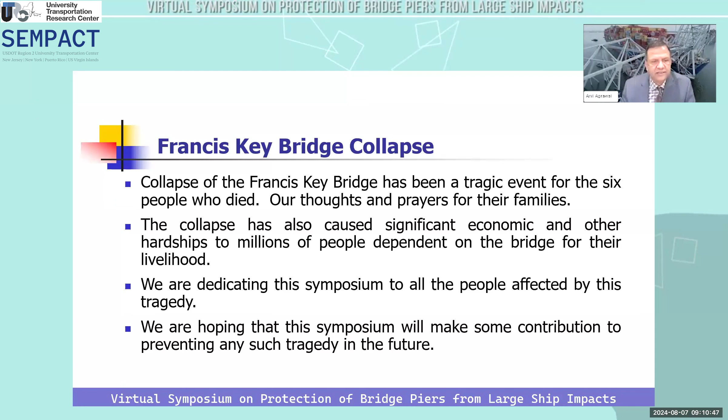Just to introduce the symposium, registration-wise, we have close to 750 people. Right now, I saw we had more than 400 people. The registration was from almost 25 countries. We have expert speakers from different time zones: Denmark, Australia, China, USA.

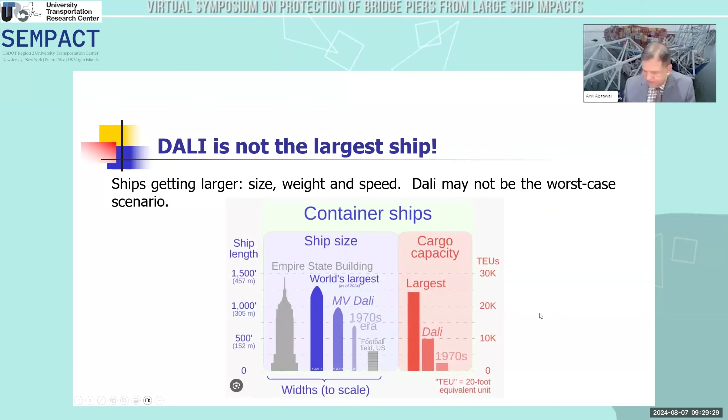So these are massive ships. But also if we look at another data, how the loading of these ships is increasing, then we can see the growth of the ship from the 1970s all the way here. And we are here. So Dali had a DWT, what we call deadweight tonnage. It's almost close to 116,000 ton.

And one of the heaviest ships that we have now, the deadweight tonnage is around more than 240,000 ton, more than double of the Dali. But also, for impact engineering, when we think about the impact, we have to consider something called displacement weight, which includes the weight of the boat itself. So if you include the weight of the boat itself for Dali, the weight will be actually not the DWT, which is 116,000 ton, but it will go to close to 150,000 ton.

And for one of the largest ships, around 10% is the self weight, so they will go to around 280 to 290,000 tons. So these are massive ships, and what do these massive ships actually mean in terms of guidelines? So I found this, and Professor Pedersen will talk in detail about his research. But I was reading his paper almost a month ago when I realized what these large ships really mean. So this is the DWT and this is the crushing force.

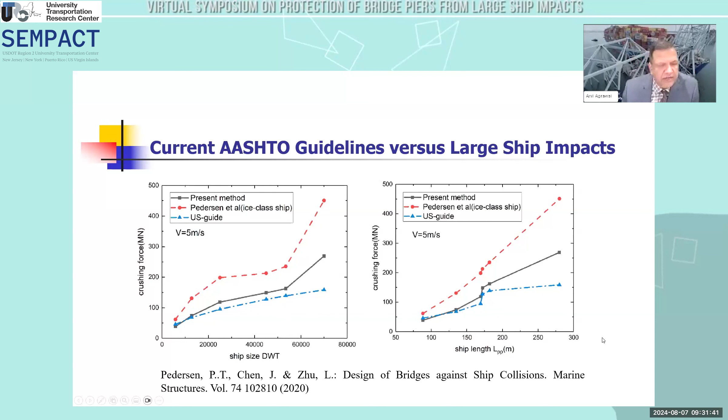And this is our AASHTO guideline, the blue curve, and it's uniformly increasing. And these are other methods by which you calculate the impact forces. And you can see that after some DWT, the impact force increases so much, it's way higher than what we have from AASHTO. And the ship length also has a significant impact on the impact forces. So the guidelines we have right now in AASHTO, which were essentially triggered after the Sunshine Skyway Bridge collapse in Florida, we need to look at those guidelines to see what exactly we are doing.

But the bigger question is, do we really have to design the bridge for large ship impact? Does the bridge have to take all the impact forces? Well, a similar analogy is blast protection of buildings: when you go in front of buildings, you see these bollards. And these bollards are basically there so that a vehicle cannot get close enough to the building, so the shock effects don't affect the building so much.

If we apply the same thing, then this is a problem of risk management: we do whatever we can to prevent the ships from impacting bridge piers. We could use rock islands, pedestals, platforms, barriers, dolphins, whatever works. Impact resistance of the pier, of course, they should be designed for impact, but that should be the last line of defense. We need to do continuous assessment based on the ship traffic and AIS data, and Zoli from HNTB is going to talk a lot about his insights into this one.

We need to design the system for guaranteed performance, and computational technology allows us to do that, just like the bridge barriers you see on the highways, which are crash tested and then verified through simulation. We could do the same. We could design the system so that a tragedy like the Maryland bridge collapse doesn't happen.

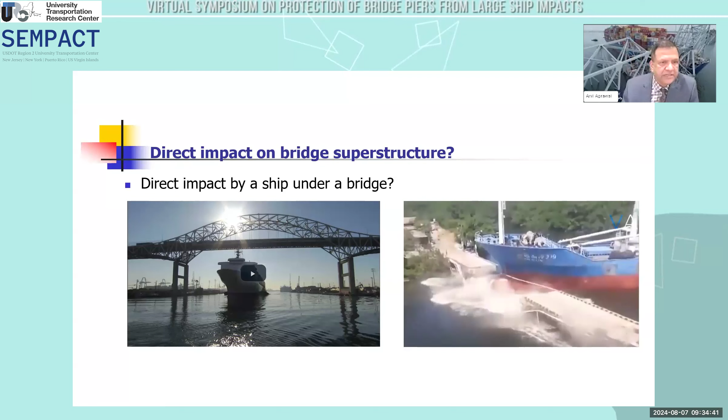I remember, many years ago, around 2000, there was an incident at the East River bridge where one of the ships had some equipment not secured. It hit part of the bridge, a major bridge. Fortunately, nothing happened. But this is another problem of large ship impacts on bridges that we probably need to think about.

So these are some of our thoughts, but I think we are going to hear a lot more from our experts on this topic, and we are going to learn a lot. And your feedback is very important, because we have a lot of people in this room and we want to get all kinds of feedback, so we can develop a roadmap based on the symposium for where we could go in addressing this problem.

So with this, I would like to invite our keynote speaker, Dr. Pedersen.

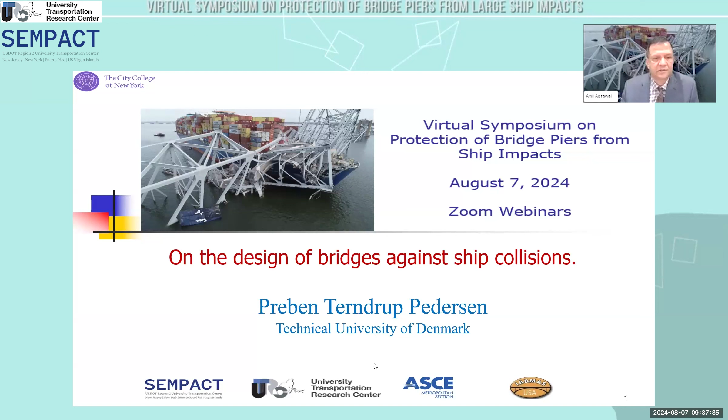No, this doesn't work. Scott, have you given me control? I don't have control here. Scott? Do you have the control now? Oh yeah, now it came.

Now it came, okay. Let me start by saying a little bit about what I'm going to talk about here. First, I'll give you a bit of my background for giving this talk. Then I'll talk about criteria for risk acceptance - what should we strive at - ship collision probability analysis, and then consequences. These consequences I'm going to talk about will really be restricted to the ship impact forces. So that is what I want to talk about.

My background, as was told, is that I'm a professor in naval architecture at the Department of Naval Architecture at the Technical University of Denmark, and my fields are really mechanics and naval architecture. But I also have a bit of practical experience, which is what I want to talk about. I was advisor for an offshore company on ship collisions against some production platforms in the North Sea. With this background, the bridge owners in Denmark - that's the government really - asked me to be advisor to them on some ship collision issues related to bridges we were going to build in Denmark.

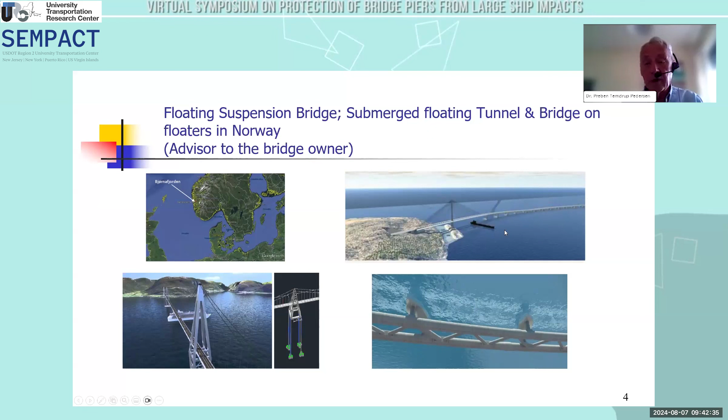And finally, this one here, this is a bridge on floaters, so all the piers here are on floaters. This one, of course, has substantial ship risk problems. This one is actually under construction now. So that was a little bit about my practical background.

Now I'll go to more technical matters. First, criteria for risk acceptance. I think it's good to hinge the discussion on what is risk. We know that risk is a combination - the risk R is a combination of the probability, PI, of an event and its consequences.

Normally, when we talk about risk and risk acceptance criteria, we have to sum all the different types of risk. This could, of course, be earthquakes, fire, or airplanes crashing into pylons, but above all, ship collisions. I'm going to talk here about the probability of accidents and consequence, and give some more information on that.

Of course, you have to do risk analysis during installation, but I'm only going to talk about operational risk. We have to look at the risk for the users of the bridge. The risk for the user of a bridge should probably not be much higher than the risk of driving on an ordinary highway. So that is one type of criteria you can start off with.

There's a financial risk for the owners, that's obvious. We also have risk for third parties which do not draw advantage from the bridge. If you look at, say, the Danish bridges I showed you, they are all over international waters. The IMO, the International Maritime Organization, a UN organization, has requirements that it should not be more difficult for ships to pass under the bridge than it was to pass the bridge line before it was constructed. So that is something to take into account.

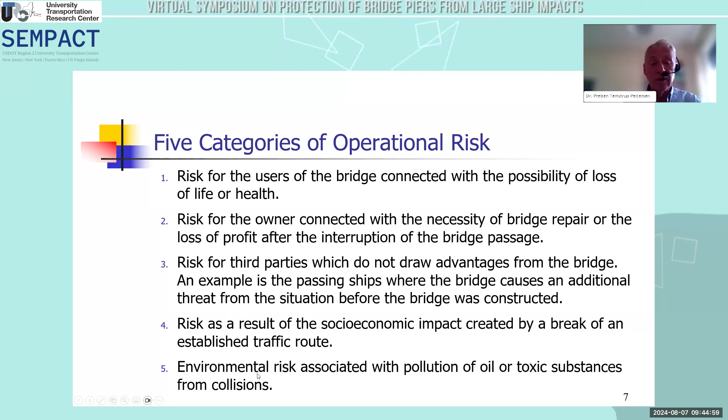So all this leads up to some risk acceptance criteria. It's obvious that a primary measure of performance for such a bridge will be to ensure that the occurrence of large accidents with fatalities - a bridge falls down, for instance - and lengthy interruptions is low enough to be acceptable to users, the public, and the relevant authorities. But we cannot ask for zero risk; we must at the same time allow an economic construction and operation of the link.

So that is this balance which we have to do. Of course, the risk level we shall accept is very small. Therefore, the likelihood of future rare events, such as ship collisions, we cannot predict or extrapolate this from similar events elsewhere - that's simply not possible. So the best we can do is try to establish models, even if these are difficult to verify, because of the small number of accidents. So we cannot measure the risk particularly well, but we can decide what the level of risk should be, and then use a model to verify that these selected criteria are met.

I really think that the risk acceptance level should be hinged to the model you're using to verify it.

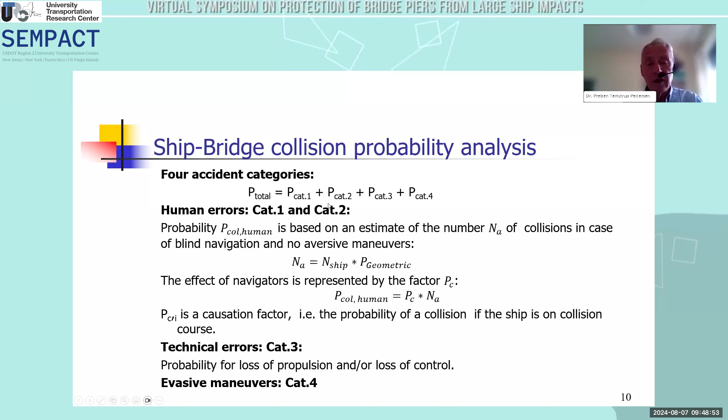This idea was developed by Dr. Fujii in Japan. He was studying accidents in the Bay of Tokyo and really laid the foundations for much of this. Then there are technical errors, of course, as we saw recently in the disaster, where you have loss of propulsion - a blackout - or loss of control - a steering gear failure. Finally, the last category is evasive maneuvers in the neighborhood of a bridge. I'll give a bit more detail about these 4 categories in the following.

Category 1 is ships which follow the main route. Here we have a bridge line and a 2-way traffic situation. Let's consider ships coming in from the south - ideally they should all be right in the middle of the navigational route, right here. But of course due to wind and waves and general navigation uncertainties, you'll have a certain distribution of vessels on this line, which we can call f of z.

You can see that part of this probability area will collide with this pylon if they don't make any change in their course. So this is the NA, the integral of this function f(z) over the width of the pylon, multiplied by the number of ships. That's the NA we had before, and now we can multiply that with the causation factor PC, which depends on a lot of things you can influence - for instance, having a pilot on board, a vessel traffic system, guard vessels, and good markings. All this will help reduce PC.

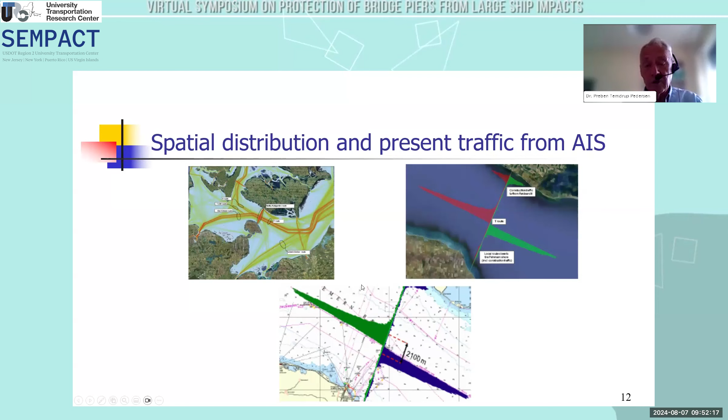So that is, and of course, we can also get the present number of ships per time unit passing this line here. So this was category 1.

Category 2, then it will be ships which fail to change course at a bend in the seaway. Let's have a look at the same figure as we saw before. We'll now consider ships which come from the north, and there is a bend in this seaway, as you can see here. But some of the ships may not observe this, may not do this bend.

And if they do that, then of course you can see there's a much larger probability area here which can collide with the pylon than what we had before. And you can see it also over here. We'll have a much larger geometric probability. So this N ship times Fz, that is a much larger value here.

And of course, it's the same PC. But then we have to multiply it with the probability that they do not make this bend. And that's hopefully a small number. This P naught must of course also depend on the distance between the bend and the bridge, this distance D here. If this is large, of course, the navigator has more time to discover that they are on a wrong course. How do we get this P naught then?

Again, we can try to use this AIS. Here's an illustration of a ship which passes a bend. So we have here, that's the route, and that's where nearly all the ships go. But there's one here which goes with unchanged course and speed until it's nearly aground before they find out that it's on a wrong track and then come back again. By studying AIS tracks, we can get a lot of information about this P naught as a function of this distance D.

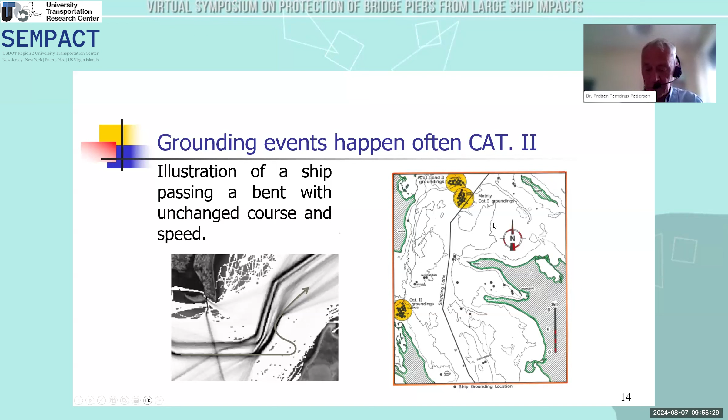Category 3, that was a problem related to the loss of propulsion and steering gear failure. Ships have a blackout, and it happens. Well, some published figures for that - that is this 1.5 times 10 to the -4 failures per hour. It corresponds to once or twice a year, something like that. That's exactly what we saw with Dali against the Baltimore Bridge.

Of course, there is a chance that you can repair, that you get the engine started again. And one used formula for that is the Weibull distribution given here. And you can see a graphical representation here. You can see that there's about a 50% chance that you get the engine started within, say, 15, 20 minutes, something like that. And then the ship will probably be on the same course and just slow down a little bit, not very much actually.

So that is one way, of course, and the rudder failure, that's given by this number here. But if it takes longer time before you can have the engine started up again, or you cannot, for instance, set out anchors to stop the vessel, then the ship will start drifting. And then the drifting, a ship will normally drift sideways. And of course, the direction and the speed would depend on the current in the area, the wind in the area, and all that. But that really you have to take into account.

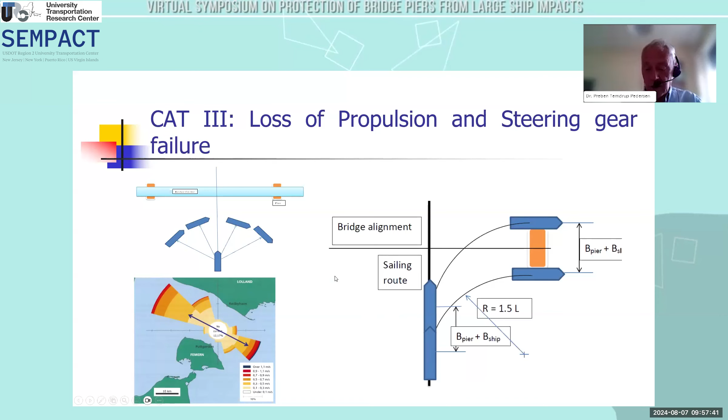The final category for collisions is evasive maneuvers near the bridge. If the bridge opening is a little bit narrow, and large ships meet there, they may be scared and try to do evasive maneuvers, which may end up with contact with the piers sideways.

You can get an idea about that possibility by looking at these safety zones, or comfort zones. Each ship has such a comfort zone around it. So if another ship is inside this comfort zone, they'll quite often try to make evasive maneuvers. These comfort zones have also been studied using AIS to see what's the size of them.

For open water navigation, it's something like this. It's proportional to the length of the vessel. When you know the length distribution of the vessels and the traffic, you can make a simulation and see how many close encounters you have per year as a function of the span width here in kilometers. So if you're down here, then the number of evasive maneuvers will be quite small.

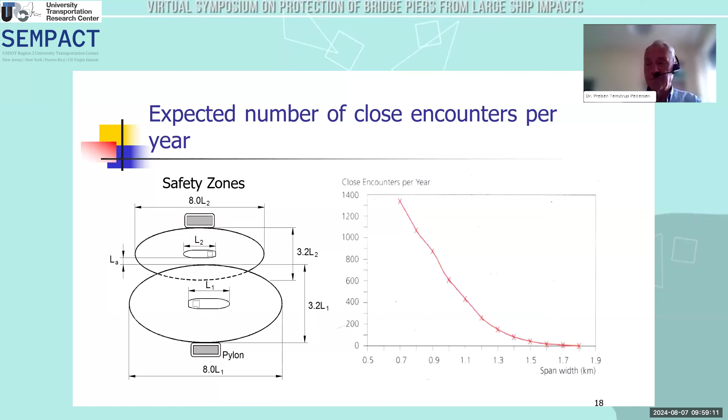It may be something you can neglect. But if you have an existing bridge with too narrow an opening, that may be something you have to think of. So now I've given you some elements in the ship collision probability analysis. The next thing will be, if we have these ship collisions, what are the consequences of these collisions?

There are many ways in which a ship can collide with a bridge. Here is depicted a sideway collision, which can be due to drifting, or due to maneuvers in the vicinity very close to the bridge. So we need formulas, we need expressions for sideway collision forces.

We also saw in Professor Agrawal's presentation that deck house collisions are something where we have a lot of spectacular collisions, where the deck house or a container stack collides with the bridge girder near the abutments. But here I'll mainly focus on bow collisions. You have a ship which collides with, here, a pylon, but we'll look at the collapse and the forces which such a ship bow can exert against some rigid wall.

Exactly, that's what we're trying to do. A ship bow is really a complicated structure, and this is an ordinary vessel without ice strengthening. You can see, for instance, the bulbous bow here, and you have lots of close stiffeners here.

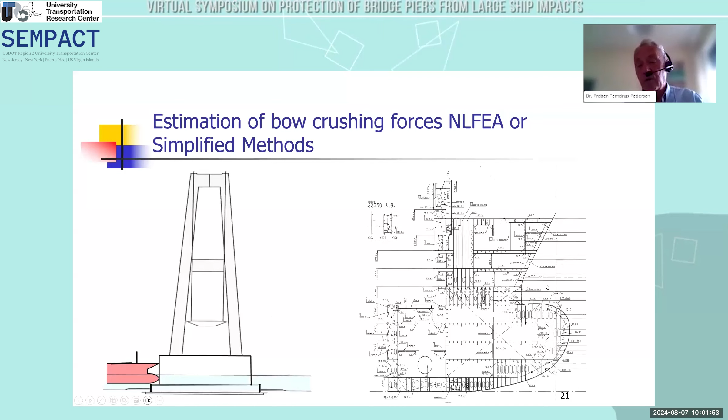Because of these complications, and because we want to make a lot of generic ship collisions in order to get some mean values, I prefer to use simplified methods, since we don't even know what will be the future striking vessel against our bridge. Simplified methods, quite often, are based on what most of us have learned at school: the upper bound theorem of plasticity.

It goes like this: you take the bow structure and make a cut at each frame, for instance, and then look at what kind of strong elements against crushing you have here. We have L sections like this, T sections like here, and we can have X sections or cruciforms like the one down here. For each of these sections, you can then calculate what is the crushing force.

We assume a certain kinematically allowable displacement function or collapse function, and then we calculate the energy which goes into bending and stretching of the material. We do that for these sections, and from that, we can get the forces by looking at the energy divided by distance.

That has been done, and made even easier to use by two well-known authors in this area. Jørgen Amdahl, in his PhD thesis, presented this formula here. You can see it depends on the number of X sections and number of T sections, etc. Sigma naught is the flow stress, the mean between the yield stress and the ultimate stress.

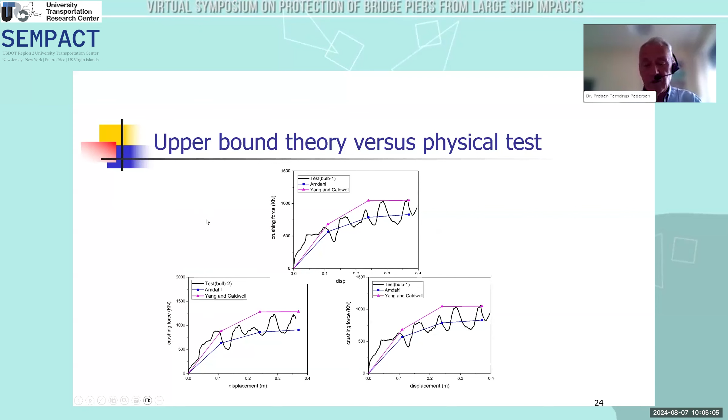You could say, why don't we use full-scale testing? Because that's the real test. And there are many ship-ship collisions, for instance. But in ship-ship collision, the bow is normally the very strong part. So the striking bow will normally always penetrate the side shell of the struck vessel. So we don't get much information about the bow strength from such collisions.

And of course, you could take an old ship on the way to its scrapyard, instrument it and run it into some fixed object. But that would be expensive. I've not seen anybody who's willing to sponsor that. But I was fortunate enough to be involved with an accident where a ship came into a harbor and suddenly they had a blackout, like the Dali. And the navigators on the bridge couldn't do anything except notice what happened.

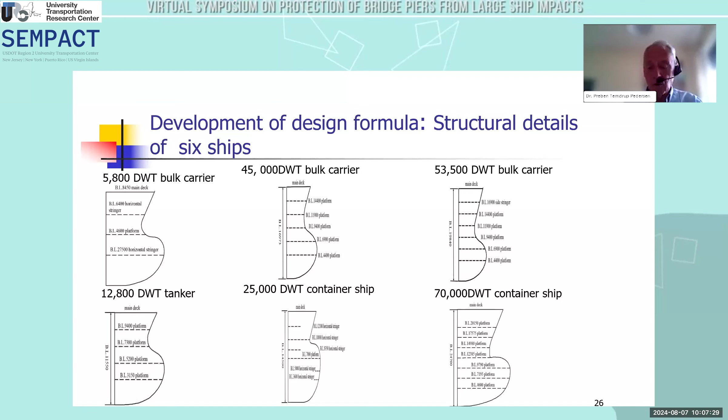Okay, so we used 6 ships to develop a design formula. We took the drawings of 6 ships, 3 bulk carriers, 1 tanker, and 2 container vessels. And for these ships with different loading conditions and different speeds, we did calculations of the bow collision forces. You can see the result here. This is the Amdahl curve, and this is the Yang and Caldwell.

And you can also see we tried to make separate predictions for the bulbous bow, because we have a step here. It would be nice to know the bulbous bow forces. So we did that for all these 6 ships for different speeds. And based on these results, we took the maximum forces and tried to make an empirical formula for maximum bow crushing forces, which can be used by bridge builders.

We used as a free parameter the kinetic energy mv squared. So we have the mass and the velocity included, and we also included the length between perpendiculars. This length really determines the scantlings of a ship hull, because the wave-induced loads depend very much on this LPP. So length is better than deadweight tonnage, in my opinion. This formula that we derived has the same format as the present Eurocode.

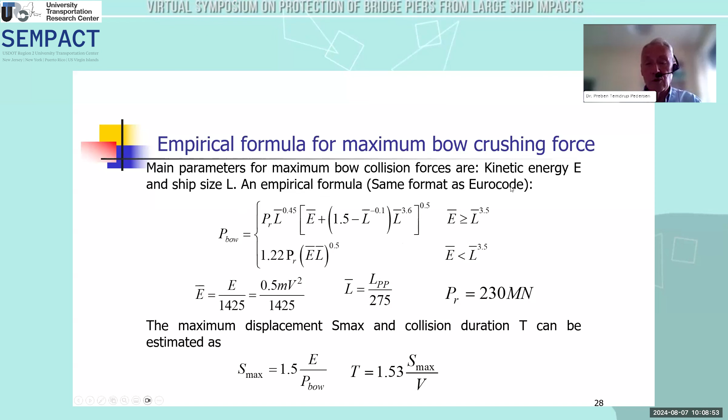So let's try to compare this with what we have in the existing codes. We did a similar calculation in 1993 for 6 different vessels in connection with the Great Belt. They were all strengthened according to the DNV Baltic Ice Class. We did that because at the entrance to the Baltic Sea in wintertime you have to have ice class. So a good proportion of all the ships going through the Great Belt had ice class.

And to be conservative, in this calculation we assumed all ships had this ice class. So that's of course a conservative idea.

Identical expressions were then adopted by IABSE SED 4. That's this green book many of you probably know, which was published by Ole Damgaard Larsen. And it was also adopted by Eurocode for a speed of 5 meters per second. Unfortunately, they did not mention in the Eurocode that this was developed for ice class vessels.

And another recommendation is, of course, the US guide AASHTO, which has this shape here. And this depends on the deadweight tonnage and does not depend on the loading condition. And of course there's quite a large difference between a loaded bulk carrier and one in ballast, more than a factor of 5.

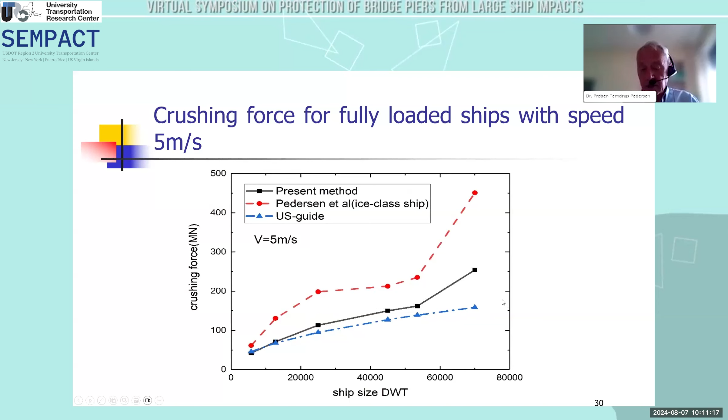We can have a look at a medium-sized container vessel. This is the Emma Maersk, which started regular service in 2006. I was very much involved with the construction of that, so I know it very well. This can take 15,500 TEU, and it was the largest of these ships at that time. It's about 400 meters long.

We also want to know what is the local pressure. When you design a pier, the local pressure is important, of course. You do not want local damage before you have overall damage. And here we looked at the bows for these 6 different ships, and then looked at the force divided by the outer area of the bulbous bow at that penetration. So this is some average pressure, you could say, as a function of this imprint, AW, that is the outer bulb cross-sectional area.

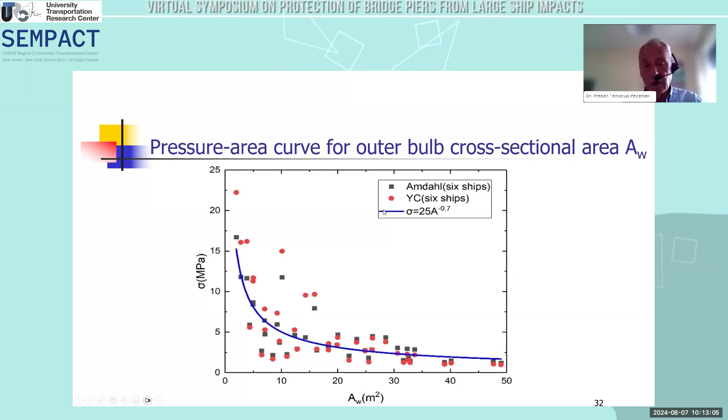And you can see there's lots of scatter. We have here a mean curve, which is given by this. This is the same shape we chose as we have for ice pressure, and we have, of course, also more or less the same scatter as we have in ice pressure.

What I've been talking about now is what you can do when you design a bridge, and of course we should know that a bridge will have a lifetime of 50 to 100 years, and a lot of things happen with the number of ships, the size of the ships, and the structure of the ships, and we will have a lot of new navigational equipment. And hopefully we will also get better prediction methods. So for this reason, we should, at regular intervals, say every 10 years, redo these calculations to see that we live up to the requirements set up by authorities or whatever we have.

Okay, I'll come to the conclusions for my talk. The collision frequency model depends on empirical and uncertain factors, such as the lateral distribution, FFZ, the causation factor, PC, the probability of missing a course change, P0, etc. With AIS, we have got a lot of new information about these quantities, but we should really try to get further data to improve our predictions. That's very important.

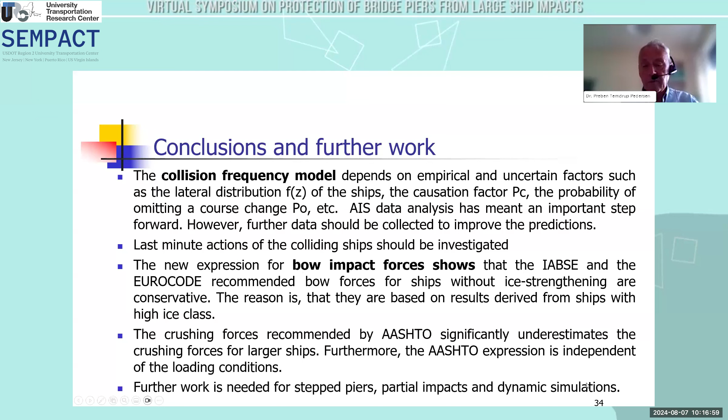We need further work for stepped piers, partial impacts, and of course, dynamic simulations of the impact. In this force, the new expression, we took into account damage and the speed using the Cowper-Symonds relation, but we should do it in connection with the pier response, of course.

Okay, I have to say this presentation is primarily based on 2 papers, and I really want to acknowledge the very heavy contributions from my co-authors, Sverre Valsgaard, Dan Olsen, Søren Spangenberg, Yin Chen and Ling Su. They have done a lot of work in this.

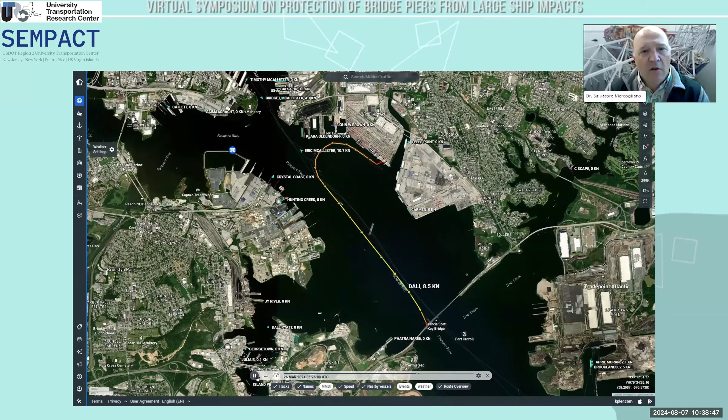In the case of motor vessel Dali, for example, she set sail that morning. She was assisted off the berth by 2 tugboats. There was a docking pilot on board, a pilot from the port of Baltimore there to assist in the removal of the vessel. Then the ship was under a Chesapeake Bay pilot. There were actually 2 on board, going to assist the ship's master in piloting the vessel out of Baltimore until it cleared the Virginia Capes down in the region of Norfolk and Cape Henry.

That morning, the ship had tested all the machinery and equipment as per normal. Everything indicated it was operating fine. I will note a couple of key issues: since COVID, we've had issues with crew retention and crew replacement. A lot of crews operating on vessels right now are operating without enough leave, without enough training time, and that has become a key issue.

This image here shows you the Dali, and you've probably all seen this multiple times, coming out of the channel. She came off the berth directly ahead in this image where the large cranes are, just underneath the chart, about dead center in the bridge is where Dali came off. She was proceeding out of the harbor at a set speed of 8 knots, which is typical for ships in the Port of Baltimore. It was standard practice in the Port of Baltimore not to have escorting tugs.

You'll notice here, Dali's gone completely dark at this moment. What is significant here is that when Dali goes dark, that's an indication that they have lost power to the main engine and throughout the vessel. What we know from the NTSB, who's released a preliminary report, the National Transportation Safety Board determined that the ship lost power because of the main breakers tripping.

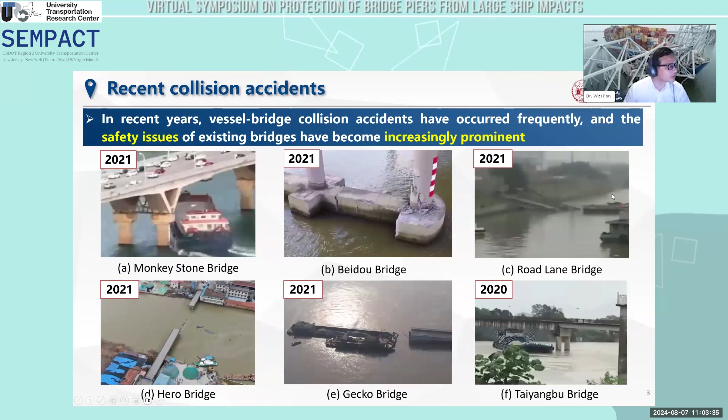Here we can see many photos about vessel bridge collision accidents in China. We can find the accident time here. Most of them caused severe damage or cracking to the bridge. We can conclude that in the past two or three years, many terrible vessel bridge accidents happened, and the safety issue of existing bridges regarding vessel collisions has become increasingly prominent.

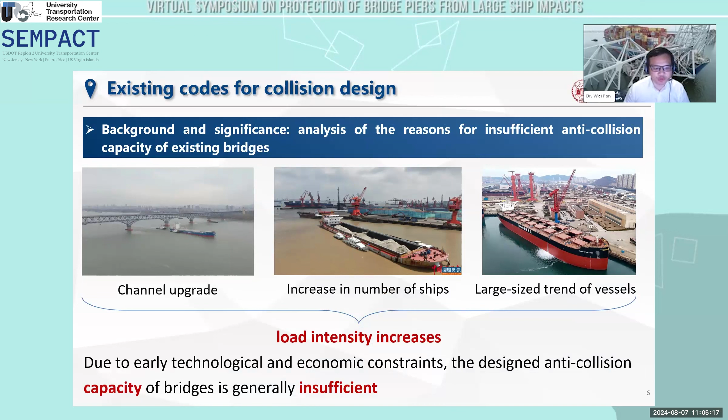We found that many things changed compared to the bridge building times. For example, the channel is upgraded, the ship number increased hugely, and vessel sizes became larger and larger. Owing to this change, the designed structural capacity of the bridge structure is often insufficient.

Second, we found that there is no code for existing bridges regarding vessel collisions. This is the China bridge design code, like the AASHTO LRFD in the US. Although it has been amended several times, it only has a small content about vessel collision issues. It points out that the design value of vessel collision action should be determined through special research. However, it doesn't give any detailed procedure about that special research.

In 2020, the Chinese Ministry of Transport released the specification for collision design of highway bridges. This is China's first specialized specification for collision design. However, the first page of this specification points out that it is only applicable to new bridges and is not applicable to existing bridges.

The latest specification for maintenance of highway bridges only states that existing bridges should be protected from vessel collision. However, we don't know how to do it, so no reasonable standards are available for the evaluation and improvement of vessel impact resistant performance of existing bridges.

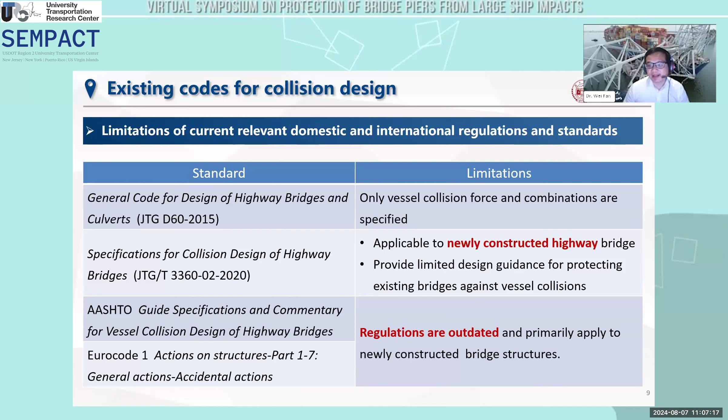Next, I will introduce the framework of our design code. Generally, our design code includes three steps: the first step is primary assessment, the second step is detailed evaluation, and the third one is improving the design.

During the primary assessment, our design code presents the principle and method for the navigation survey and bridge survey. After that, we can get the collision possibility and collision case. We can define vessel collision load action and create a bridge analysis model, then use dynamic analysis methods like the CVIA method and impact force time history analysis method.

We can get the bridge response under the required collision events and evaluate performance - safe or unsafe - of the existing bridge under vessel collision based on the capacity to demand ratio. If the capacity is greater than the demand, that means no retrofit improvement is required. Otherwise, the impact resistant performance should be improved to attain the expected requirement.

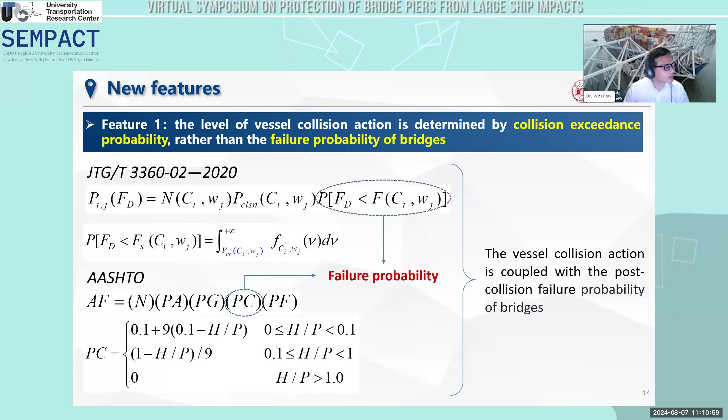So we found... sorry, wait a moment. Yeah, Dr. Fan, there's a lag, I think, with your internet connection. So you just click once and then wait. If you keep clicking on it, it'll just keep going, it'll store it in its memory and keep going.

Maybe some network problem is here. Can we help you go to a particular slide? Scott can help you go to the slide, maybe slide 15. Scott, can you help him go to slide 15? Yeah. Oh, yeah, good. Thank you.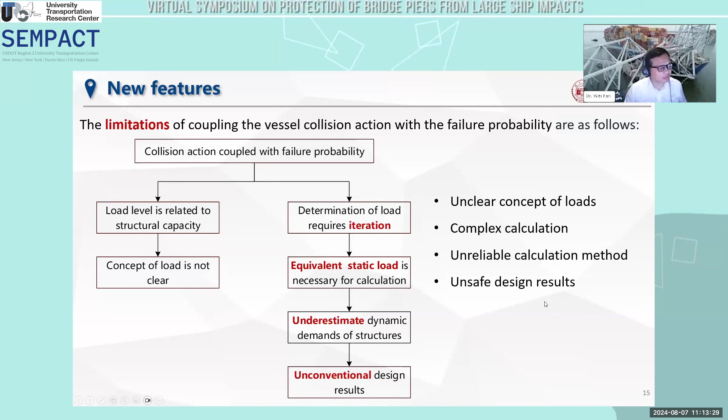Here is our result. We can find the limitation of using the equivalent static load because the equivalent static method ignores the dynamic effect. The structural demand is significantly underestimated. The result is similar to that given in the slide of Professor Consolazio's team. I guess Professor Consolazio is talking more about this.

For these reasons, we remove the failure probabilities here. We can get the corrected exceedance probability for these equations. In our new code, the selected exceedance probability level is equivalent to that given in the seismic design code, for consistent risk considerations. We define two different vessel collision actions: V1 actions corresponding to a 500-year return period, and V2 actions corresponding to a 200-year return period. And here we can see...

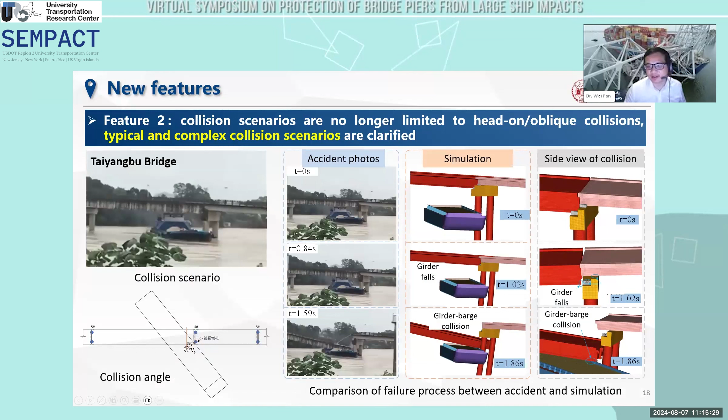The second new feature is that the collision cases are no longer limited to head-on and oblique collisions, just like side collisions were considered in the new design. This is a case just like the Taiyangbu Bridge accident, where the bridge was hit on the side by a collision, and the bridge cracked. We simulated this side collision accident.

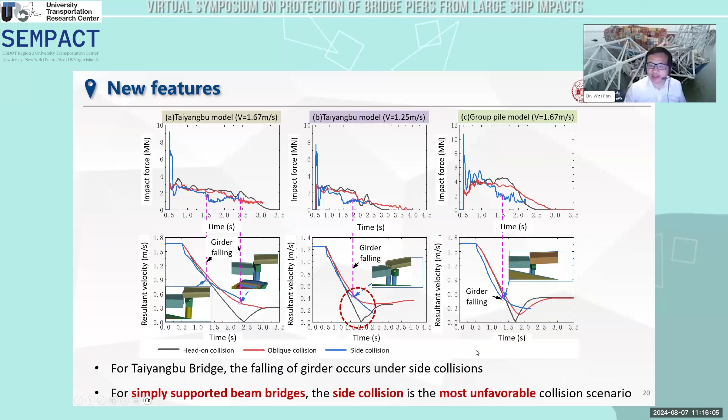For these reasons, four different collision cases are specified for the collision design in our new design code. For each collision case, the analysis method and the modeling method are also specified.

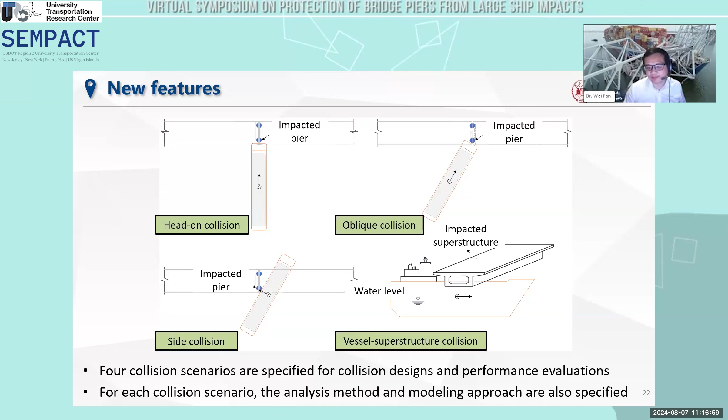The third feature is about the applicability testing of the dynamic vessel impact load. We adopt shock spectrum approximations to assess and validate the developed barge bow force-deformation relationship, overcoming the deficiencies in individual tests and traditional fits. This is our developed barge bow force-deformation relationship. Detailed information can be found in these papers.

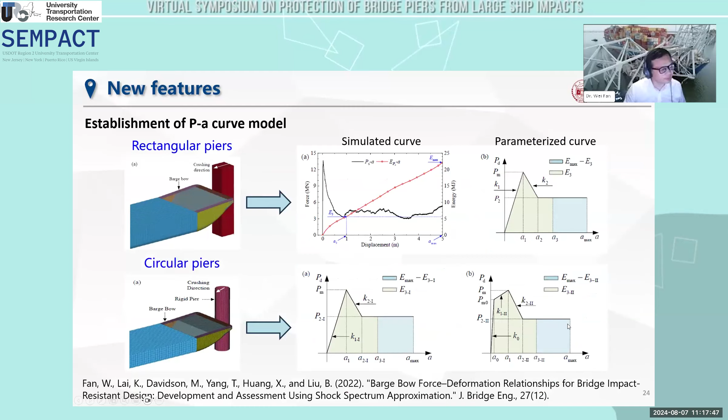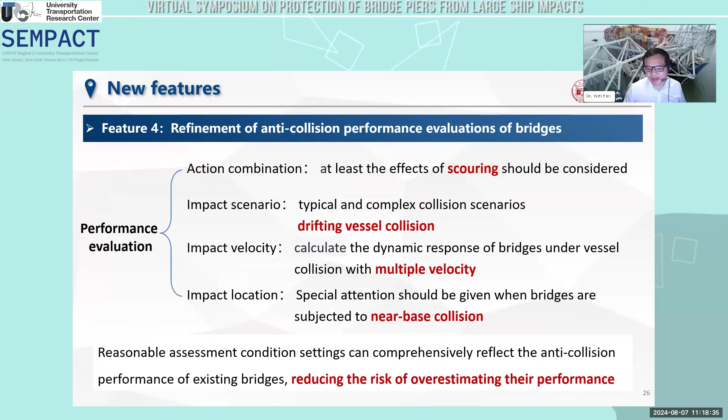When we consider shock spectrum approximations, we found that the developed vessel impact load is more reasonable. When we only examine the applicability of the developed vessel impact loading on a limited case-by-case basis, the generality cannot be guaranteed. Additionally, we also refined the performance evaluation, for instance regarding action combinations, impact scenario, impact velocity, and impact locations. We conducted fragility analysis of reinforced concrete bridges under multi-hazard effects, such as corrosion combined with scouring.

Based on the calculation, we found that the structural damage does not always increase with the increase of the collision energies. On the contrary, a phenomenon that the dynamic response decreases with the increase of the impact velocity is observed.

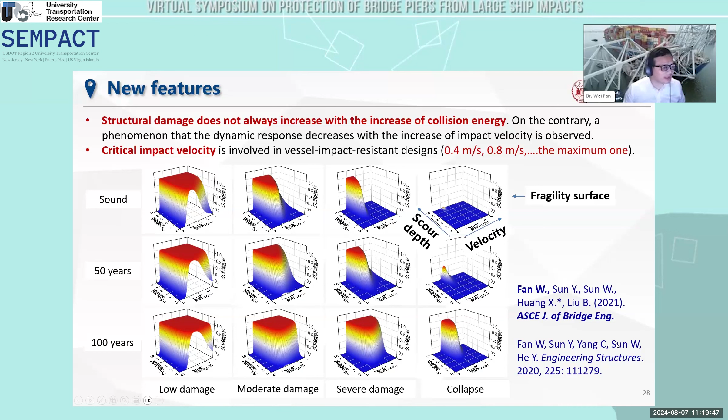Critical impact velocity is involved in the impact vessel impact resistant design, so we don't allow the use of only the maximum impact velocity in all the design code. Several different impact velocities should be considered to obtain the maximum response. We can find more detail from these papers.

We also found that when a bridge is subject to near-base collision, the ratio of the impact height to column depth is approximately 1.5, the performance evaluation should be more cautious, because the brittle shear failure is triggered.

For the key bridge, the impact maybe belongs to the near-base collisions, and the brittle shear failures occur.

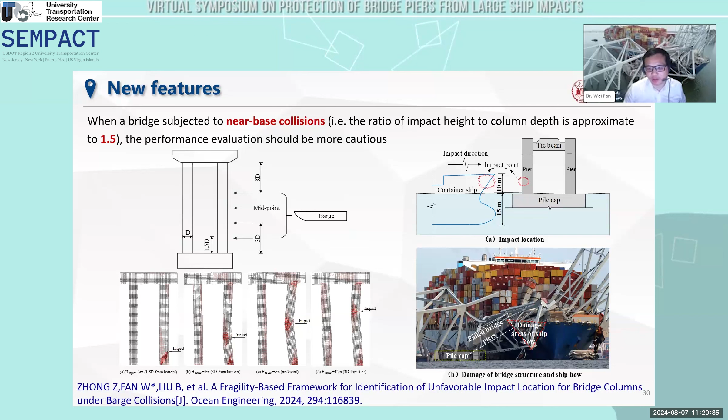We also adopt a shear stress calculation formula, which is more suitable for small shear span ratios. This shear span ratio is less than 2. Here we can find the result is much better than the ACI formula.

And finally, I will summarize in my presentation. I have focused on this topic for 17 years. There are still many issues with further research needed.

Many factors, just like vessel, bridge, water, and weather, affect the vessel-bridge collision and its consequence. High nonlinearities, such as geometry, material, and contact, place extreme difficulty in the analysis and the protection of the bridge against vessel collisions. We need to do our utmost for vessel impact resistant design of bridge structures, much more.

And this is the specification that was released this month, and this book was published in Chinese maybe 2 years ago.

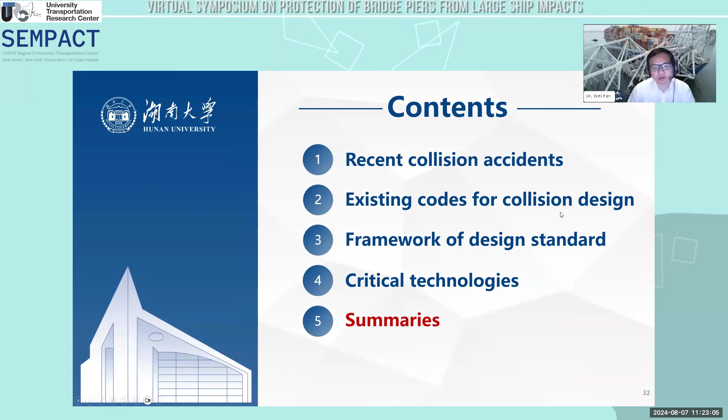You don't need to go back to the slide. That means, you know, PC is the mean of the consequence, that is the result, just the mean of the calculation's result. Yes, that one is related to the bridge resistance. So here, typically we use this one to determine the load. So you determine the load, and you need to determine the structural capacity here. So that means the load and the result are coupled together. So if you use an equivalent static load, that is no problem. But if you use a dynamic load, that is difficult. So for these reasons, we are removing the PC term from the equation.

Okay, a question, this was actually directed to Professor Pedersen. It's on a geotechnical issue that he did not want to respond to because it's not within his area of expertise. But I'd like to ask this of you: how does the geotechnical, it's written as subsurface characterization, get modeled in your vessel impact analysis?

Like, when you did the piles, did you model the subsurface conditions in order to get the pile resistance? We used nonlinear models to simulate the pile foundations. Pile resistance here, like fiber-based elements, is used to simulate the pile foundation. So we can use P-Y curves to simulate the pile and soil interaction behavior here.

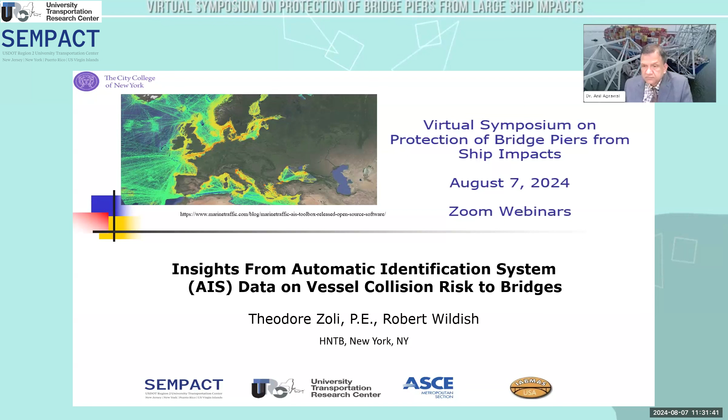So I don't think I have control yet. Scott? Yeah, now I do. Very well.

One of the challenges, and I'm sure Mike Knott and others are going to talk about the development of the U.S. codes, and I'm going to speak very specifically about U.S. practice here, is that obviously these codes have been incredible in the sense that they were developed in the beginning in the late 1980s, early 1990s, and have really stood up to the test of time. But an enormous challenge in anything we do is when we look at how much change happens over time, are we fast enough and capable enough of developing codes that respond to intrinsic changes in the industry?

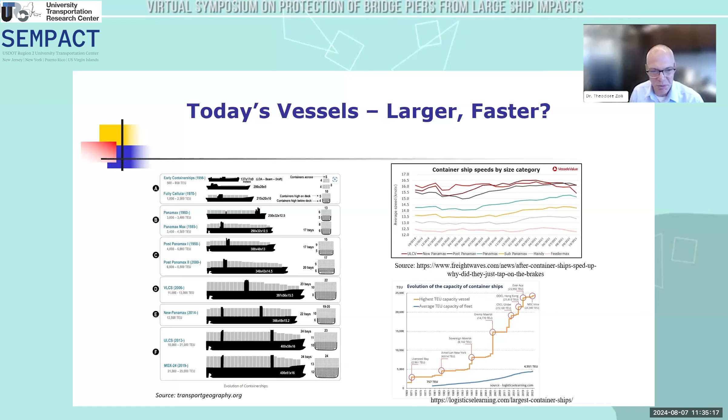We've got larger ships. It turns out the larger ships may reduce the number of transits, so that would argue for reduced risk. But the size and the speed are really challenging when we think about bridges we've designed in the past and bridges we're either going to replace or design in the future. And so the other piece that I think Dr. Pedersen presented beautifully, but I always worry about, is what is more recent accident data, and do we have accident data sets that we can make sure are relevant in terms of current technologies, right?

Obviously, what's changed dramatically since the 1990s, and I'll talk a lot about AIS in a moment here, is we have much better backup systems in terms of ship control. We have much better knowledge of where the ship is positionally against other ships. We've got VTS, we've got traffic systems within busy port areas. We have a lot of things that are helping to reduce collisions and collision risk. And that's against what I talked about before, the changes in vessel size and speed.

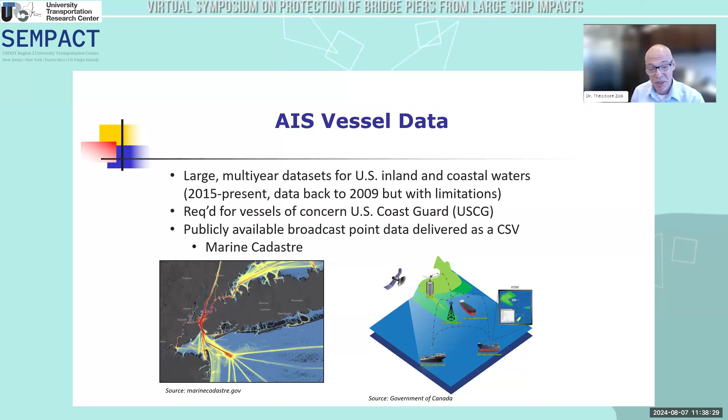I'm very interested in data, in how it's changing the practice of bridge design in the US, and the data sets that I'm used to are weigh-in-motion, how heavy are our trucks, and those data sets have really changed the way I think about how to design bridges, especially in areas where there's a significant proportion of overweight trucks. I also feel the same way about extreme rainfall data. I'm hard at work looking at these data sets and trying to identify strategies that make bridges safer, and this AIS data set is really robust. So this is a U.S. Coast Guard product. The website, the Marine Cadastre website.

That website, all of this is readily available. Since 2015, you can put a geofence. So if you have a bridge, and in this case, I'm just going to walk you through 3 or 4 bridges where you can put a geofence around the bridge, and every one of those points, and this data set is for about 6 years from 2018 on.

Every vessel that has AIS, which is the vast majority of vessels that we're concerned about, as Dr. Pedersen said, anything above 300 gross tons, so anything we're concerned about for large bridges is in that data set. You can see just by the quality of the data set, there's a few points that are obviously on land. Those are data sets that are not quite correct, but I would say this data is very clean. It needs a little bit of cleaning, but not much.

And so what's in this data that's important for bridge designers, and at least for me, just to get this out to everyone, the 2 most important pieces are speed over ground and course over ground. So you have both headings and you have speeds. And then also these are correlated with vessel ID. So you can know the vessel, its speed and its heading at 1-minute intervals anywhere in the US that has AIS coverage, which is the vast majority. And then you can geofence around a specific bridge.

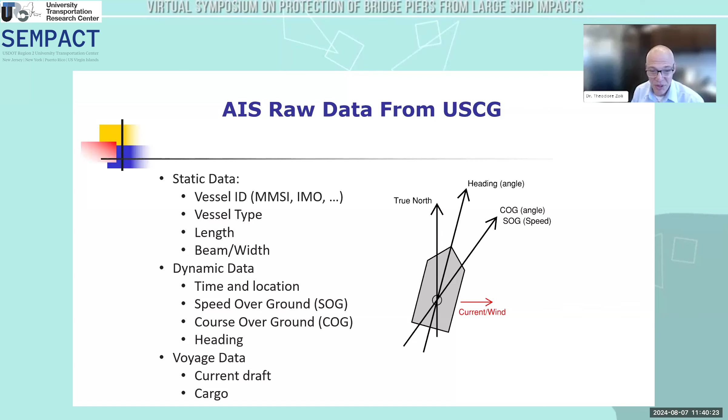So there's other data that would be useful that's not in that data set, and there's many ways to get at, let's say, deadweight tonnage, and I agree with Dr. Pedersen's sensibility. It's not the greatest measure, but that's what's in AASHTO right now. Deadweight tonnage is not direct from the AIS data set, but you can connect by IMO number or vessel name through a number of resources online to calculate deadweight tonnage or any other characteristic. And you can also check the data set from Marine Cadastre against Vessel Finder data sets and see how they compare.

Gary Consolazio, as has been mentioned, has done a lot of work on this front with some of his students. I'm hoping he's done some statewide risk assessments for Florida using these data sets. And I hope he at least has a chance to mention that effort.

So this is all ArcGIS based. So anywhere in the country that has coordinates, this gives you toolboxes that are within Marine Cadastre. You've got the points. So each point is a location of a vessel, which will have speed and heading, and then you can link the vessel trips. And so this happens to be for the Cape Cod Canal and some bridges that we're looking at.

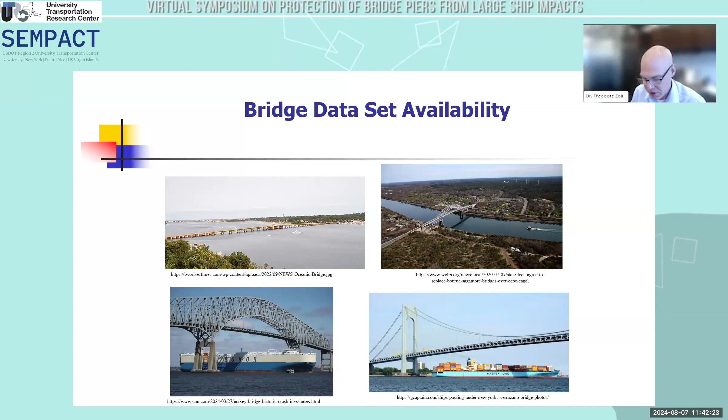So I thought I'd quickly go through data sets from a wide variety of bridges. So FSK was of interest, what Sal had mentioned. Verrazano, obviously a big bridge at the mouth of all of the ports that serve metropolitan New York and really the region. And then quite a small bridge in Ocean County in New Jersey, and then the Cape Cod Canal bridges. You can see here that these data sets are very rich. This is all using a geofence window. So you have all of this data in front of you for really an array of bridge crossings.

And then I thought I'd just go through some of the conclusions, because AASHTO design provisions have some very specific aspects, and you can easily test with these data sets whether some of the provisions in AASHTO correlate with actual data.

On the left here is Francis Scott Key, and these are just deadweight tonnage distributions for vessels greater than 50 meters. And so if we think about 116,000 deadweight tonnage as it relates to the port of Baltimore, you can see about where the Dali fits in. So even though there's a significant number of vessels in that size and slightly above it, it's really on the high end.

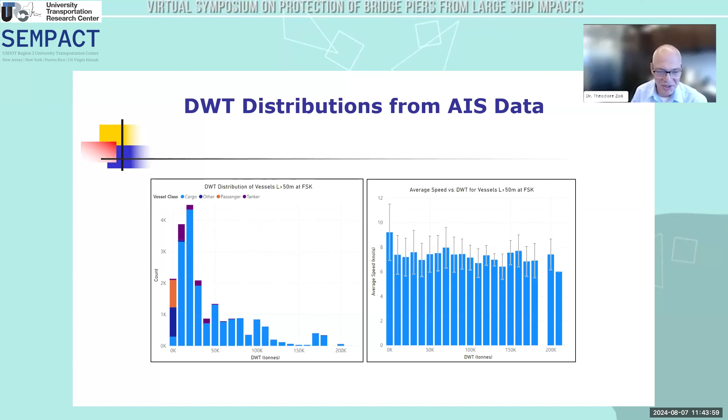Similarly, if we look at speed, and this is transit speed in the vicinity of the bridge, and Sal mentioned that you're around 8 knots, look at how closely that data matches 8 knots. So you clearly have a very regular set of circumstances under the Francis Scott Key Bridge, and that just comports. And I can say Sal and I did not coordinate any of our talks beforehand. That's just what the data shows.

So the other thing that we can look at is just how the classes of vessels compare in terms of speed. And again, because we're aggregating risk on vessel class, I think this data set is that rich. You can go class specific. There's also the question about, is there any monthly variation? And this can be, as I'll mention in a related Chinese study, there can be quite interesting seasonal effects, especially with rivers that have swifter currents.

So you can see the difference between cargo, passenger, and tanker speeds and so on, and the passenger tends to be on the high end, and the cargo and bulk is very narrow banded around 8 knots. So we can now look at comparing what we see from that same data set, and if we look at FSK versus Verrazano, just in terms of speed over ground in knots, you can see much, much higher speeds underneath the Verrazano Narrows Bridge, as you might expect, right? There's not the same proximity of the port itself, and there's less maneuvering.

But what's of interest, and I'll speak some later, is that there are speed restrictions, or supposed to be speed restrictions of 10 knots, mostly for North Atlantic right whale safety, and it doesn't seem like those speeds are being very well kept, regardless of vessel type. The other thing that I would mention is we see very high speeds from cruise ships, and cruise ships are some of the largest ships that we see underneath the Verrazano.

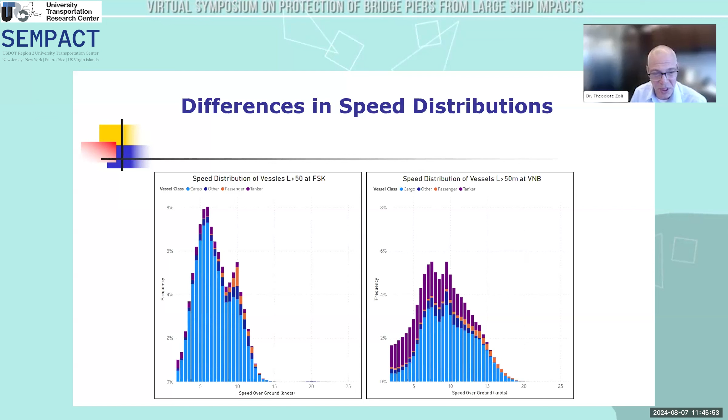So if I were just to overlay, and here all I'm overlaying is speed over ground distributions for large cargo vessels, so this is only cargo. And if I overlay those two histograms against each other, you see clustering around obviously 8 knots as we've described, but Verrazano's got significantly higher vessel speeds, and that represents its own issue.

The other thing that we can look at, and this was a Jason Stith question in the chat, just to respond to that some, is what is the distribution, the statistics on AIS data in terms of distance from center line of channel? And I'm representing this as relative distances. I'll have an LOA representation in a second. But what you can see, and Dr. Pedersen mentioned this, is a bimodal distribution. AASHTO would assume a normal distribution, which if you look at the passenger vessels in the right-hand curve, that's closer to normal distribution, but not very well correlated with LOA.

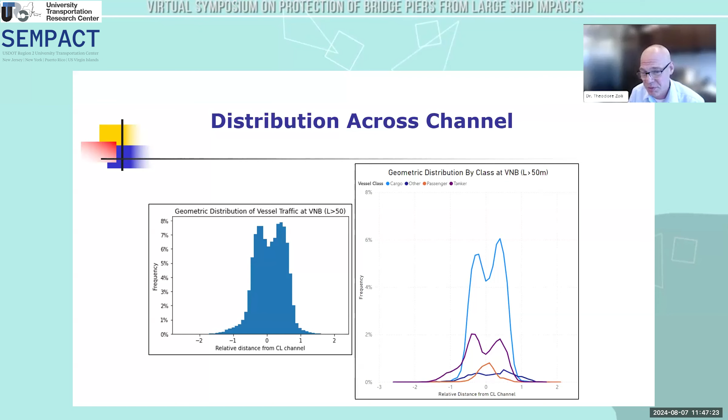The bimodal distribution is because you have ships in alternate directions. So you have more of a normal distribution if you look at directionality. So you can separate inbound versus outbound ships very easily. And that represents different risk profiles on different components of the bridge. That's easy to capture in this data. And then one other question is, okay, how much does speed vary depending on where you are in the channel? And again, AASHTO provisions don't really correlate with data sets we see, and these data sets are very different from one facility to another. So I think there's nothing like rich data.

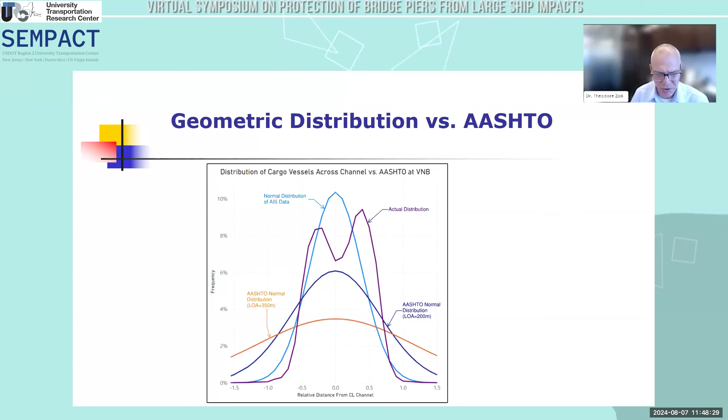And if we were to compare, just generally speaking, that bimodal distribution versus an equivalent normal distribution to try to get this into AASHTO terms from an AIS perspective, and then compare that with the AASHTO distribution, which is a function of LOA, you can see that in terms of risk, we're much more conservative using AASHTO distributions than what we see, based on Verrazano in this case, which is a bridge with a very wide navigational channel. So that's one other thing that's important to recognize. This is quite different from FSK. And so there's any way you can crunch the data.

I'm also very interested in looking at vessel length versus channel aberrancy or channel distance, probability of being further away from the channel. And this, for Verrazano, doesn't happen to be well correlated. The size of the ship doesn't put it so much in the center of the channel. And so some of this work that we've done really follows work, and in my view, there's too little of this work yet done in the industry, but there's a very interesting Chinese paper that covers a very complex channel that I don't know how you would design without AIS data.

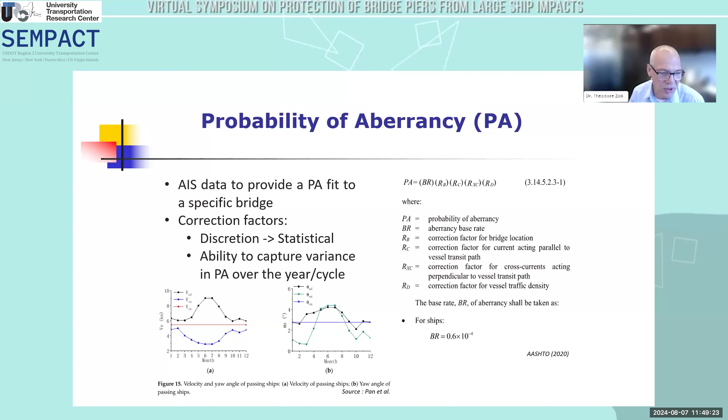This captures some of what I said about seasonal differences based on just difference in currents and depending on month. Also, this is a bridge with two distinct channels, and you can see the significant differences in distribution from AASHTO style distributions, and also, for me, we really have to start thinking, and this is another limitation, that extreme value analysis wasn't really in play in the late 80s and early 90s.

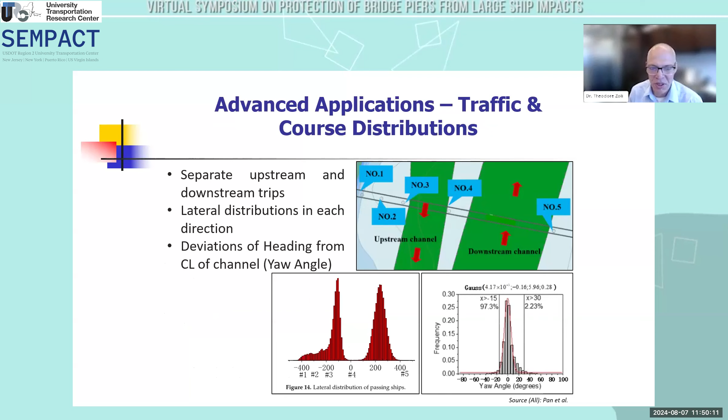Now with the statistics and the capabilities with distributions, I think we can do a lot better job at assessing risk. But just to give you a sense of these channels, you have a sort of upstream and downstream channel. You can think about this as inbound and outbound, and how different those circumstances are with one AIS data set. This is, if memory serves me, only for a year or two of data.

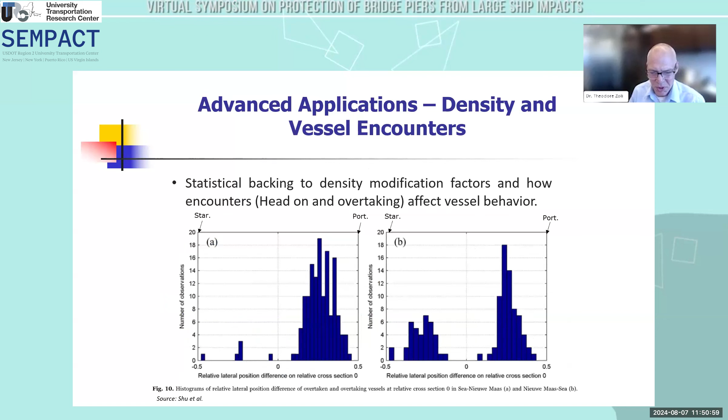In my view, you can imagine how you could use this data for a bridge project near you. It gives you so much better sensibilities, and this idea of speed over ground and course over ground gives you a sense of course corrections, accident data sets, where you can look at probability of aberrancy. This is just the richest data set out there, and in my view, we can also more carefully investigate the potential for overtaking, as Dr. Pedersen mentioned, this whole bubble, this elliptical bubble around vessels and when they're passing, and looking at how that influences risk.

This is some of Gary Consolazio's... oh, actually, this is not Gary's work. This is work by others who are looking at AIS data more from the perspective of managing the safety of species.

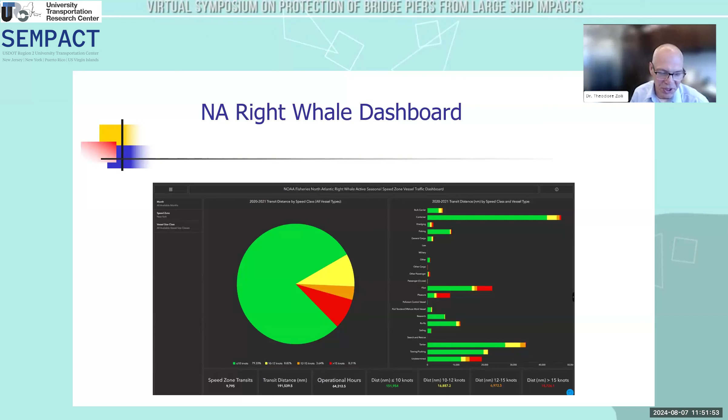Now I'll come back to the speed limitations associated with the North Atlantic right whale. This is a third party dataset, actually NOAA's data set on vessel speed under the Verrazzano. So you remember we had maybe half of the vessels at over the 10 knot speed limitation, and this is the data set when the speed limitation should be in place, and this is also by vessel class. But you can see that you have a significant number of vessels that are over 15 knots.

So just to finish up here, I think the AASHTO methodology has held us in good stead, but these AIS data sets, especially since 2018, are readily available in the US. Obviously the Chinese studies that I've shown, and there are some good Korean studies looking at AIS data sets for bridge risk. The AIS data set is a worldwide data set, but the availability of it in the US for US bridges, I think, is exceptional.

I really encourage not just the bridge practitioners in the U.S. to look at this AIS data set and make their own evaluations of statistics. But I also encourage AASHTO to take this on - it's a very necessary step to use AIS to make better improvements, to look at the AASHTO provisions and hopefully have better representations, or even develop workflows where AIS data can be used by designers to have better risk models.

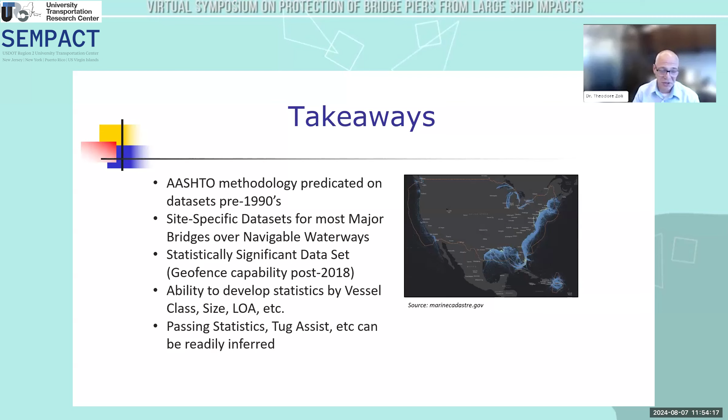And 6 years of data pretty well everywhere in the US, I think, will give us insights into how to do that better. I've listed the references at the end. What I would suggest to all of you is that this AIS data is readily available. I think we all should be using it more and more to give us insights into doing a better job at assessing vessel risk. Thank you.

Dr. Zoli, thank you very much. This is, again, quite a different perspective on the issue from the previous presentations. There are a number of questions, and I'd like to go back to one that was actually posed to Professor Pedersen, and you had indicated that you also had an interest in responding to this one.

It's from Jason Stith, and it goes like this: the probability function f of z, spatial distribution for AASHTO, uses the length overall as the standard deviation from the normal distribution function. This seems quite conservative. Since you've looked at a lot of AIS data, which you've presented, do you have a recommendation for AASHTO that could be more accurate?

So my recommendation would be twofold. One, I would rely on the AIS data, especially given that there's 5 to 6 years of it, in terms of developing a distribution. And then, Jason, the other thing I would say is it's very directional. It's surprisingly directional, and it varies by class significantly.

The Verrazzano data set is an interesting one, where the geometry of cruise ships, mostly because of air draft and their need to be under the middle of the bridge to meet air draft requirements, showed variability very different than container ships. Container ships were very directional, whereas cruise ships were not. So this data set allows you to look at geometric probability directly by class and develop your own distributions.

This presentation is about large ship collision with bridges, and essentially the word for that is allision. I could have replaced that sentence with just that word.

But I'd like to talk about another angle in terms of this series of presentations, and the motivation is the collapse of the Francis Scott Key Bridge. I think that raised our concern worldwide about the level of demand that can be posed by these events. The previous presentations have focused on reducing the risk, but when it happens, how much force is developed?

That is one of the key objectives I would like to discuss today. I would like to compare our results to those prescribed by existing codes, specifically AASHTO, and I would also like to talk about the potential of simulation tools and how those are useful for us as a design community as we design these long span bridges with the risk inherent to the shipping around them.

I'd like to talk about the finite element model of a large container ship. This is a Neo-Panamax class ship, similar to the Dali. Below is a comparison between both ships, between the finite element model and the Dali. The Neo-Panamax is typically about 300 meters long. When fully loaded, it's about 150,000 tons, and its deadweight tonnage, which is what you can load it with, is about 117,000 tons. The finite element model was created from actual plans for the ship.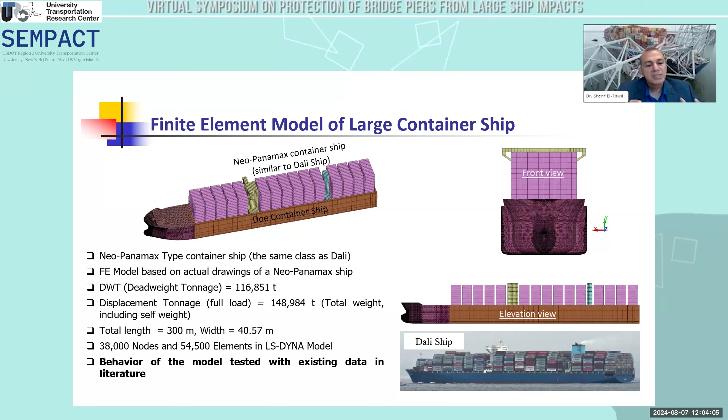Validating something like this is impossible, as Dr. Pedersen said before. Who's going to lend you a ship so that you can crash it and check that your finite element model is behaving correctly? In simulation, if you can validate small subcomponents, you can reasonably assume that your overall model is going to work well. The model contains the stiffeners, their nonlinear behavior, and the contact between all of these various components. These were tested under various pieces, and we see them working fine, so we have relative confidence in our model.

Now, when we started doing this, we said, okay, how much force can be developed, and how much is a static versus dynamic force? That was a question raised before. So we crashed the ship into a rigid pier, and the pier is 5 meters by 5 meters. The initial velocity is 3.5 meters per second.

Please excuse me for using kips—a kip is a kilopound, 1,000 pounds. In this case, the ship had two parts: the bow, which was flared, and the bottom part, which both impact the column almost simultaneously. We track the force applied by both parts and add them together. I'm showing here a peak force of 51,294 kips. The result has been filtered with a moving 50 millisecond window.

We've conducted a lot of research on truck impact with bridge piers, and researchers for the past 40 years have been using the 50 millisecond force as a reasonable representation of the impact force generated and considered for design. You could think about other ways of filtering this data, maybe averaging it out or taking over a shorter period. But regardless, the force is applied over a large period, not a few milliseconds—the 51,000 is over, in this case, maybe 0.2 or 0.3 seconds. That is sufficient to cause damage.

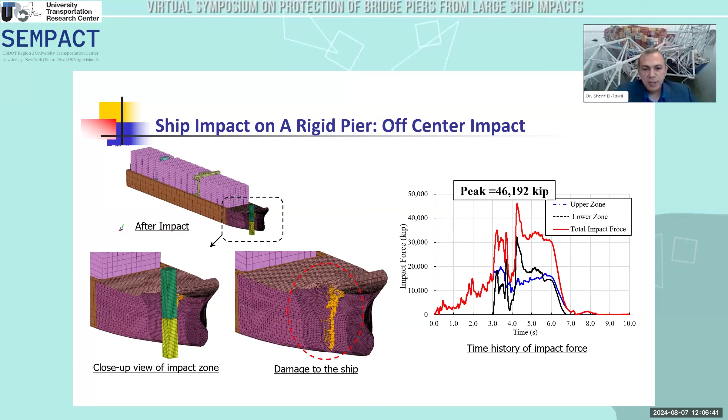So that presented an issue for us. Does the rigid pier assumption make sense? Do you think the pier, if it were flexible, would allow the force to decrease? What is the real force that would be applied to a ship in a situation like this?

So we deployed two bridges. We had been doing research for the past maybe 5 or 6 years on the robustness of long span bridges, so we have access to multiple bridge models that we had built over multiple years and validated. We decided we're going to take our ship and crash it into these bridges and see if they will collapse, and if they do not, what is the level of force that would be generated.

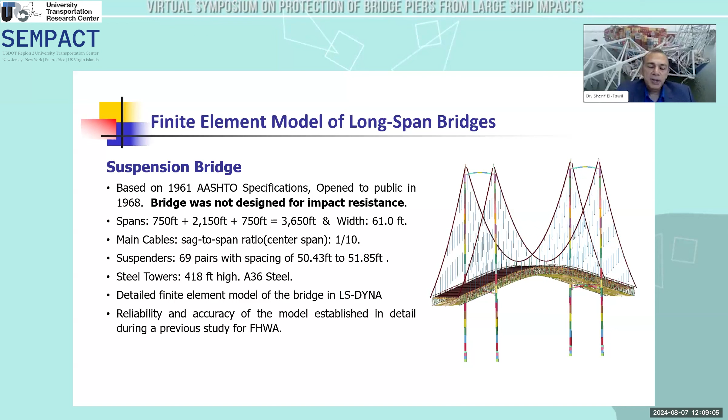The towers were 418 feet tall, more than 100 meters, and the model was built in LS-DYNA. Over more than a year, we validated the various aspects of the model when we created it. Just to show you the level of detail that went into it: the members of the stiffening truss could buckle, yield, and fracture. The main cables could also buckle if needed, as well as the suspenders. The various parts of the deck were modeled, including the ability of the deck to yield and fracture, and also crush the concrete. This was important, especially when modeling the joints, because we didn't want that to generate large catenary forces, especially when it moved a lot.

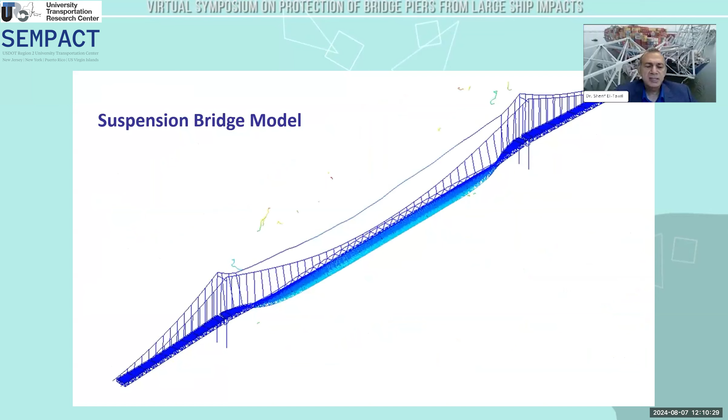To give you an idea, this is a situation where we are looking at various suspenders failing and how many it would take to bring down the bridge. In this case, this was as the bridge was collapsing and the tower and its various components were failing.

Another bridge that we've been working on is a cable-stayed bridge. This is an even bigger one than the previous bridge I mentioned. The central span is 1,500 feet. The tower is pretty substantial and much thicker than the steel one for the previous bridge. Again, this bridge had a lot of details that were modeled, but I'm not going to go into it in the interest of time.

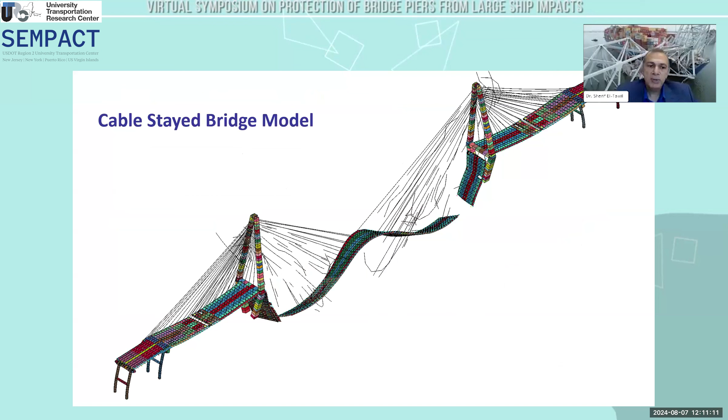But I wanted to show you again the limitations of the modeling technique we're using. This is the bridge when various cables were failed, and this is how it would basically behave as it's collapsing. But again, I'm not going to present results related to the cable-stayed bridge. This is something we're currently working on.

I'm just going to present results with respect to the suspension bridge itself. So we have here the ship, the model that I described a little while ago. It's now approaching the bridge pier, a steel bridge pier in this case, a 150,000 ton ship, approaching at 3.5 meters per second or 6.8 knots.

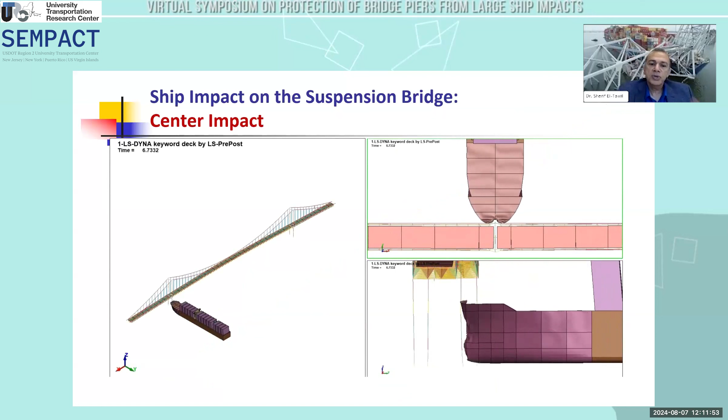So I'll play the video as you know, you can watch as I talk. Basically, both parts of the ship are approaching the pier, and now pushing against it. If the demand is too high, the pier is going to buckle under the extreme forces and the rest of the bridge would follow. But in this case, this did not happen.

The bridge had sufficient robustness and strength to prevent this from occurring. If you look at the force distribution, the force time history, and the displacement time history, you can see that the pier deformed about 4 feet, that's 1.3 meters. Interestingly, there was enough elasticity that it pushed the ship back again. These are massive structural components.

In this case, the peak force, which I believe would be a design force, given how long the force acted - about half a second, as you can see up there - was 42,000 kips. So substantially higher than the 32,000 kips that we would estimate from the AASHTO provisions. But again, we'll discuss this towards the end.

Looking at the pier, you can see that the impact location is at the height of the ship. Again, this is a massive bridge with a massive ship impacting it. They kind of do not dwarf one another as you would expect.

If I zoom in on the pier zone, you can see that the plastic rotation that occurred is 0.06 radians. 0.06 radians within the unified facilities criteria for blast, for example, and even for seismic criteria, is something that is survivable. This member would have been deleted if it had reached our fracture criteria. It was not. But the reason I'm talking about the 0.06 radians here is because it is reasonable for a steel component to be able to achieve this.

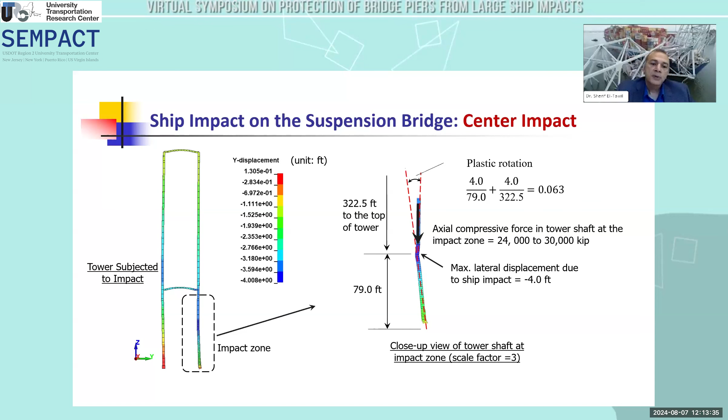Moving forward, we thought, okay, in the Dali situation, the ship was off-centered, so let us do that here. What if the ship caught only the flared part of the bow and basically allowed it to move in a little bit?

I'd like to mention that the ship model does not include solid fluid interaction, as there's a question here from Arjang about this. So you could think that perhaps this is an underestimation of what is happening. But again, these are some very preliminary simulations that we have been doing over the past month or so.

Looking at the damage that has occurred, you can see the Dali ship - and again, this is not proof that the simulation is perfect. It is just showing that we are able to model with substantial reasonableness, if that is a word, the kind of damage that is occurring at the deck level and below as well.

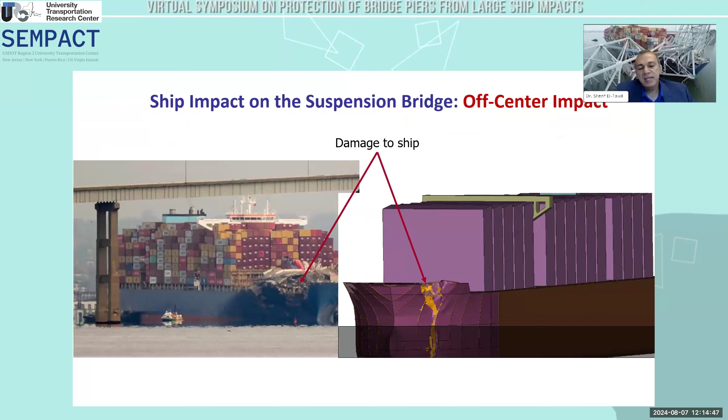We then said, okay, we have the model working, we have the ship model operating perfectly as well. Well, what if we came in at an angle? How would that change things?

So we tried to model an oblique impact, with the ship coming in at 45 degrees. Now, the behavior of the bridge is quite different when you push it along its axis versus pushing it perpendicular to its axis. Perpendicular to the axis, you are mobilizing the frame, and the frame is a massive steel structure. Perpendicular to the axis is different than parallel to the axis.

When it's parallel to the axis, you're starting to push on a cantilever that is 400 feet tall, 130 meters tall, and supported at the very top with the cables. But like I mentioned, the cable goes over the saddle. The force is about 25,000 kips, with a large coefficient of friction there holding it in place. So we weren't really sure what would happen in a situation like this.

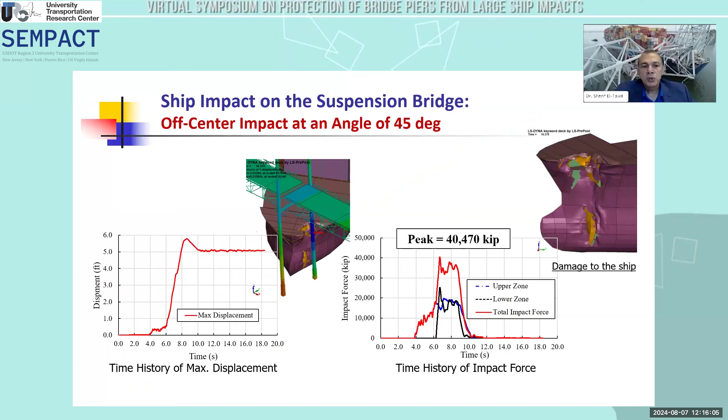So the bridge approached, the ship approached the bridge, whacked into it, and basically, again, stopped. The rebound happened, and the impact force was about 41,000 kips or so. So in this particular case, the bridge survived this impact.

So I'd like to summarize where we are, and I have a couple more slides before I wrap up. The demand that we calculated exceeded that computed from the AASHTO equation. For the off-center impact, we reached 43,000 kips versus the estimated 32,000 - that's a 35% increase.

Okay, that could be within the range of variability of the equations that were developed. But for the oblique impact, the recommendation is to use half of the force in the direction parallel to the bridge axis. And in this case, the component was 29,000 kips, which is from the previous slide, 40,000 kips at 45 degrees. And that is an 80% increase, more than the AASHTO provisions.

Multiple speakers today talked about the force level or force demands from the AASHTO provisions being perhaps insufficient. And I think this is more evidence of that here. I should also mention that when the force is applied, the bridge has now moved 4 or 5 feet. You have a terrific P-delta effect, a question from Jordan Warnicki here, that could lead to the buckling of these massive components. But in this case, that did not happen.

In all of the simulation cases for this large Neo-Panamax class ship, the tower was damaged. It sustained significant plastic deformations, but those deformations were deemed acceptable for the steel components that were used. Certainly, this is something that would need to be ascertained in the future, but this particular bridge would have survived an impact that was similar to the Dali ship crashing into the Baltimore Bridge.

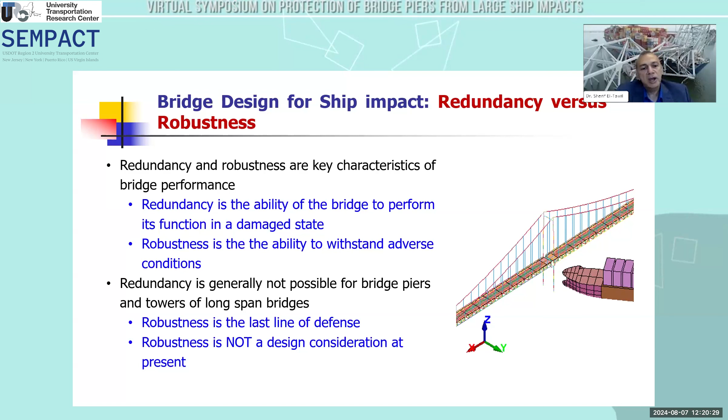Now, coming back to the topic of this bridge, redundancy is generally not possible because these massive bridges are typically based on a frame like the one I'm showing on the right there that has two members. Sometimes there's just one large member. And if you lose one of those two members or you lose that last member, you do not have redundancy. What you have is robustness, and it is the last line of defense. There is no way around that. And interestingly, robustness is not a design consideration at present, and I strongly argue that it should be. So my thesis and that of my co-authors is that robustness must be ensured in long-span bridges.

So what is the design ship? And this was debated quite a bit by our previous authors. There will always be a bigger ship. The 33,000 gross weight tonnage ship that collapsed the Sunshine Skyway is 1/5 the weight of the Dali that caused the Francis Key Bridge to collapse. And it's probably going to be 1/5 of a ship 50 years from now. What is the design ship? How do we ensure robustness?

And the other thing that was also debated was, okay, who is responsible? And we learned from Sal that this is a really complex question for limiting the size of the ships that go into these ports. The ports are motivated by profits, as are the shipping companies. That is something, as designers, I did not know personally before today. And so I would think that the design philosophy that kind of makes sense from a structural engineering perspective is to employ a multi-layered approach.

We should have a minimum lateral resistance for piers. And that should not be a small number. This should be a huge number that would force a designer to make these bridge piers significant. We should also deploy supplementary protective systems such as barriers, raised platforms, whatever, dolphins that would prevent direct impact between a ship and a bridge.

And these should not be arbitrary systems. They should be designed using a performance-based approach that has been very successful for seismic and for blast situations. These should be designed no damage for low-level impact. We don't want to go repair these every 2 weeks, but in a severe situation, they might fail. They might allow the ship to pierce the defense, but the bridge will not collapse.

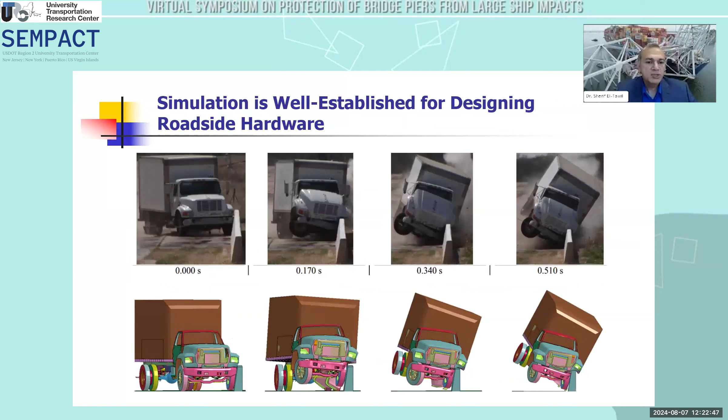Okay? So the software that is available now for simulation is quite well established. I'm showing here some of our previous research on truck impacting roadside hardware. You can see that in this situation, even larger truck impacting a bridge pier, the comparison between the various components is actually pretty good for these cases.

So in conclusion, long span bridges do have inherent robustness. That's because they're so big, but is it enough? We've shown that a suspension bridge built in 1962 does have sufficient robustness to withstand the Dali. Our preliminary simulations with the cable-stayed bridge, I didn't show that, also survived direct impact, but the Key Bridge did not survive. It had a different type of structural system.

We think that a multi-layered approach needs to be implemented. Piers must have a minimum lateral resistance. We cannot imply that this could be low. It has to be very large. Direct impact should be prevented using a system within a performance-based design framework. This performance is something that would be set by engineers as they think about what is acceptable.

And we offered a kind of framework for that based on concepts from earthquake engineering. And simulation is a reliable means for achieving this. And we're currently looking with our models right now at how these large ships would collapse from the impact situations.

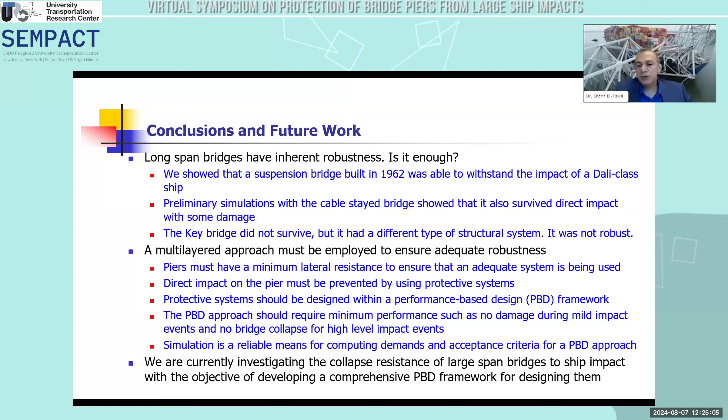There are fluid structure interaction components that are pretty substantial. So as the ship moves, it is moving with a lot of fluid and water around it, and that will increase the impact force, perhaps substantially. And that would make the AASHTO provisions even less conservative than what I mentioned. And the soil structure interaction may change the behavior at the boundary, but the impact was pretty high in both of these bridges, and I'm not sure that it would be substantial, but it's something that we are working on right now.

There's a question from an anonymous attendee. Did the truss structure of the FSK bridge increase the overall damage? Can you say the question again, Srini, please? Did the truss structure of the FSK bridge increase the overall damage? Oh, no, I don't think so. I think the FSK bridge collapsed because the piers were so thin.

So it had an A structure. If I were building this again, I would not have an A structure of two thin components. I would have a large pier instead of two parts. So that is it. The two legs, one of them fails, the bridge is going to collapse. It's a very simple situation, unfortunately.

Srini, I just wanted to add something that I've been thinking about. When you look at the truss bridges and suspension bridges and cable-stayed bridges, suspension-based towers and cable-stayed based towers, they're under a lot of compression, and that significant amount of compression itself gives rise to a stronger section.

The truss bridge at the top, it's essentially sitting on the bearing, and it's almost like for the impact force, it's cantilevered. So, yes, that factor is there in the collapse. But again, what exactly led to the collapse, what are the mechanisms, that has to be investigated by using a similar kind of crash technology.